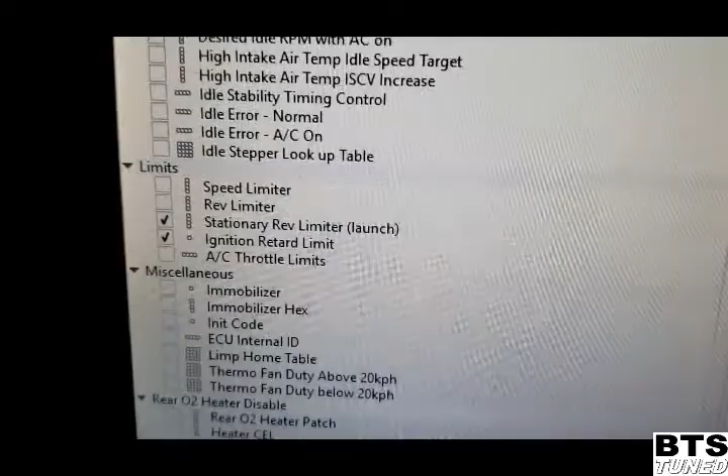Quick rundown: the factory limiter is pretty basic. If you have the Chrome mod on your Jester, Clone, or whatever ECU on your 3S, you're probably used to seeing some options such as this or these.

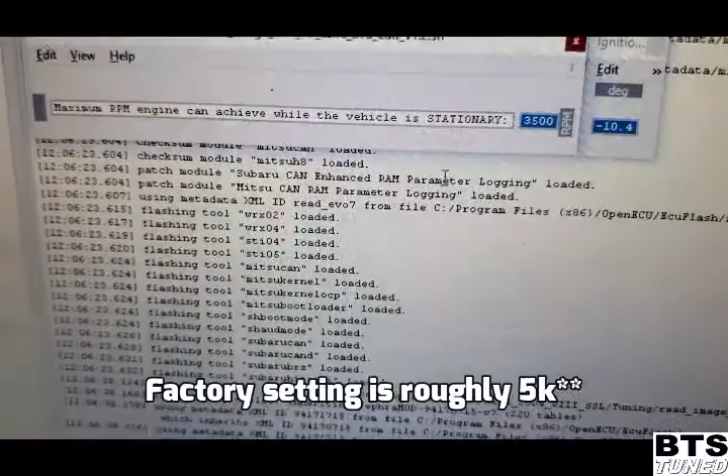I have it modestly set, for example. Now, it may or may not build some boost, probably a couple pounds, which is what it's intended to do, keep it safer. However, there are better ways to create the desired result and effect, which I will do afterward. But as a baseline, I wanted to show how much these basic settings will produce with a max ignition timing pull of negative 10.4 degrees and a modest 3,500 RPM.

Engine's still warming up, so once that's properly warmed up, go from there. Let's see.

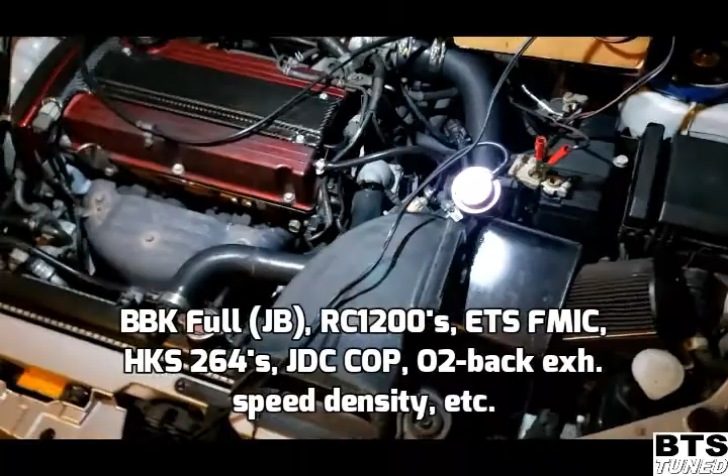Warmed up to operating temperature. Let's see what that basic setting does. Looks like about 10. I think we can do better.

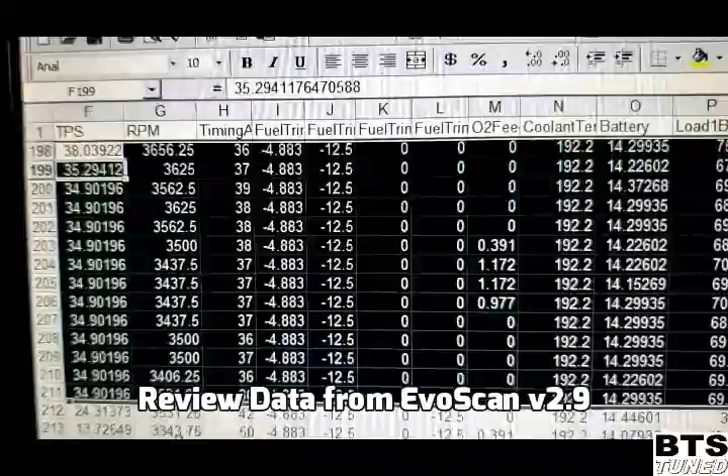So here is a result from the basic rev limiter for stationary. Held it at about a third throttle just for testing.

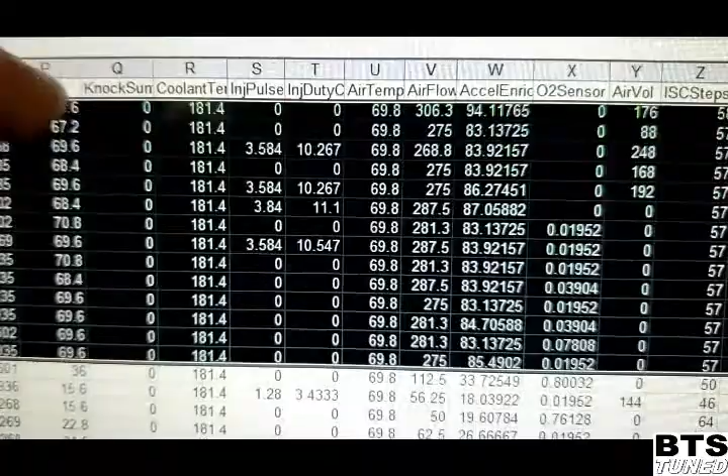As you can see, with the O2 sensor right here, it is a fuel cut. You can also see it here with the pulse. And see that timing is still advanced.

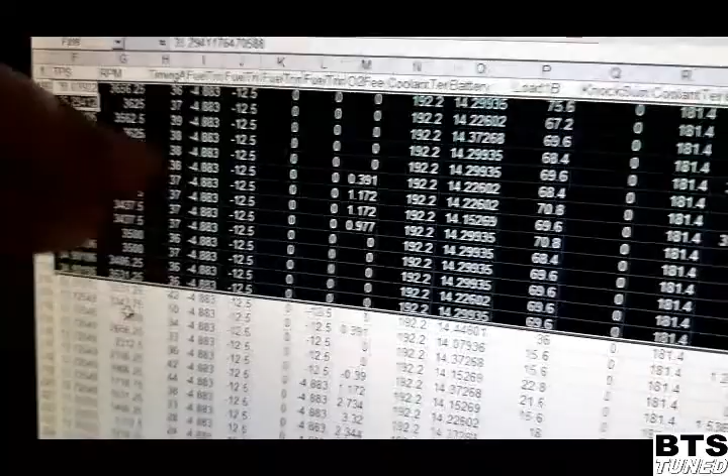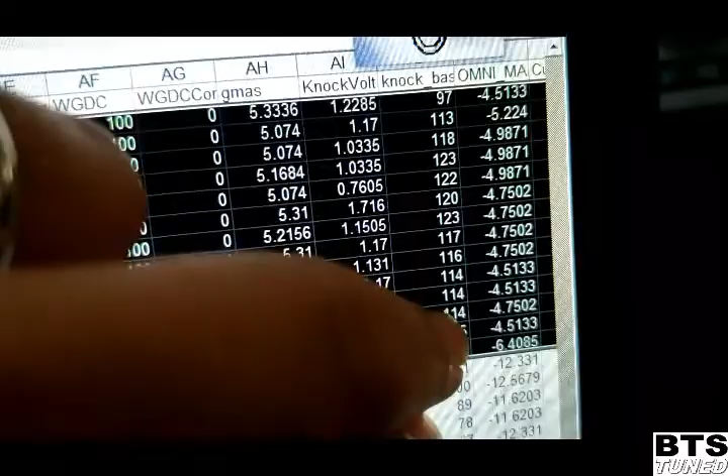And if you look at my Omni 4-bar map sensor, due to the Tephra version 7 speed density ROM, didn't really build shit for boost. So definitely room for improvement. I mean, fuck, it only hit 70 load, which isn't shit. About 300 hertz.

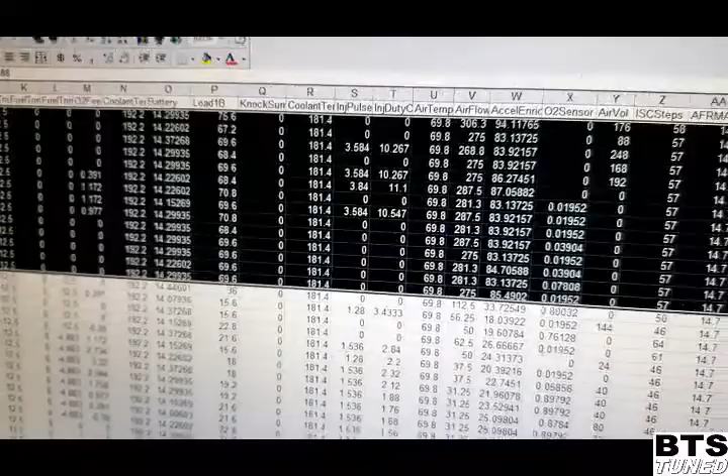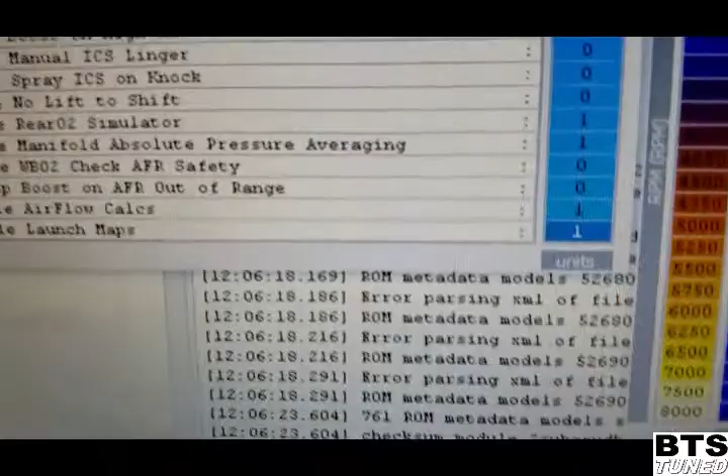Let's see what I can do in ECU flash. So in the Tephra version 7 ROM, ECU flash, first thing I did was enable the launch maps. Same process that I did on Ben's 2006 EVO IX GSR like 5-6 years ago.

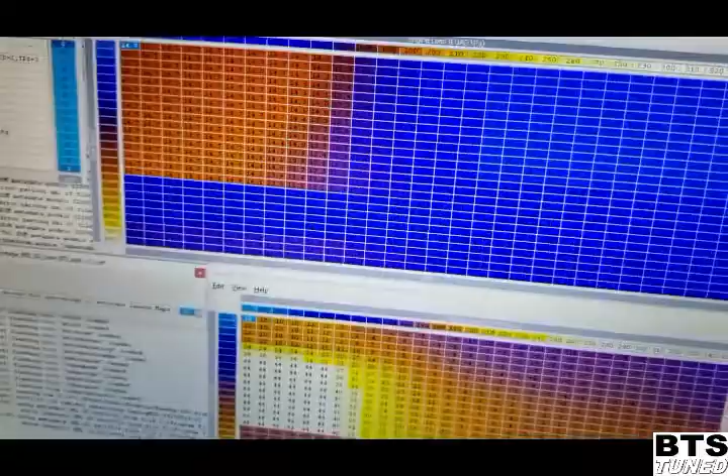Have my fuel map and ignition map going to target the load that we hit, and a little bit more since I anticipate building some actual boost with some more action going on at the turbine manifold. Add more fuel, pull more timing, and find the right balance. Not going to be as aggressive as the AEM drag anti-lag system, but it is going to be very similar. Obviously not going for that extremity.

All right, all set to go. All done. And let's see what we build now.

Moment of truth. Operating temp. Whew, scary. Actually built a little boost. Not trying to get crazy and aggressive, but did its job so far.

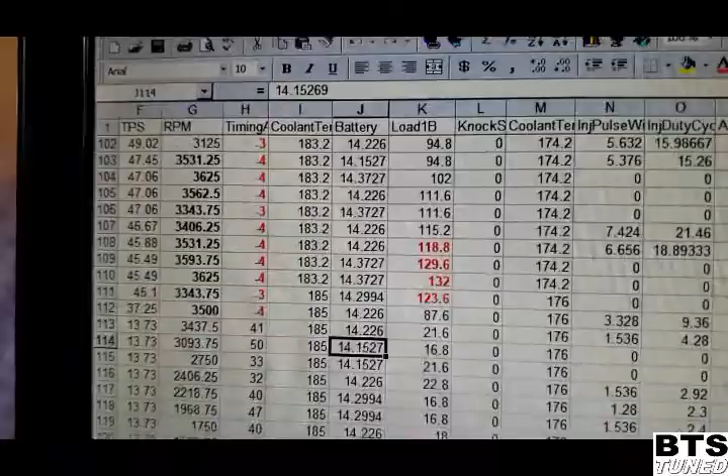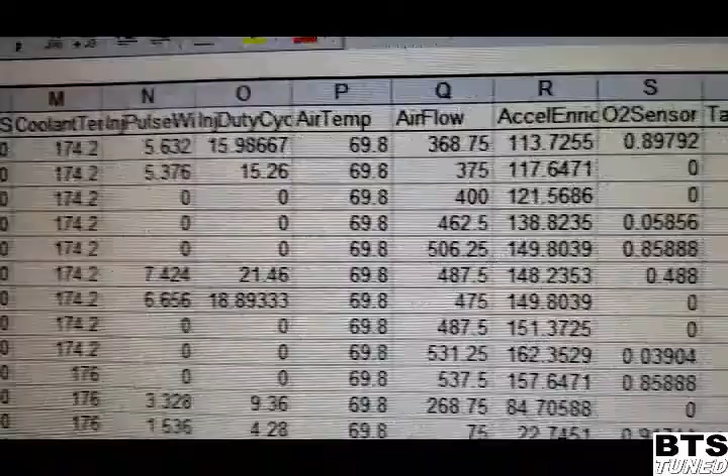So as you can see here, reviewing the data, it's a mild success. Timing was pulled. Now at about 120, 130 load, which you can see in the 1-byte, and built approximately 1.5, almost 2 psi.

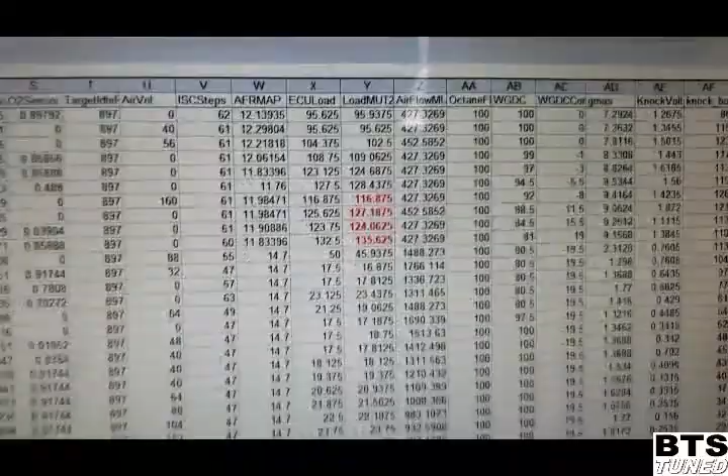Again, this is very conservative for demonstrative purposes. Ideally, you just need to raise the limiter if I want to, and get more aggressive with it until I reach 10 psi, 1 bar perhaps. I'm not trying to piss off my neighbors, and even though I know it can hook, I know that there are other areas that would need strengthening or upgrading to reliably hold it and be durable. So that concludes the demonstration.